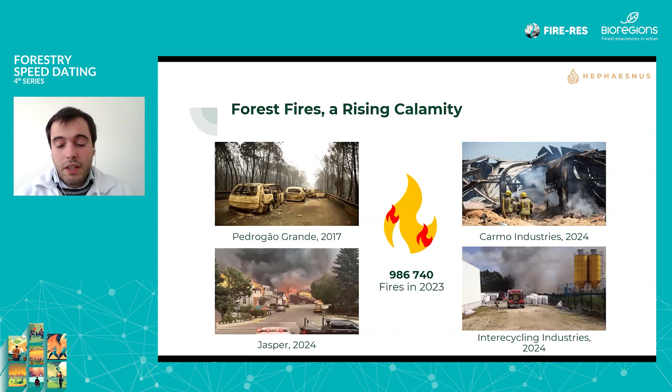Just in the last year, the small town of Jasper in Canada was completely destroyed by a nearby forest fire, causing damages to over 300 houses and structures. However, this type of forest fire is not just destroying our forests and small assets, it's also destroying high economic value. These are just two of the latest examples that happened here in Portugal, but this can replicate hundreds of times across the globe. And as the recent fires in Los Angeles have shown, large forest fires are sadly here to stay. Now, we at Hephaesnus developed a solution that will be able to tackle the damages caused by these fires, and for that, we've created Sallus Guard.

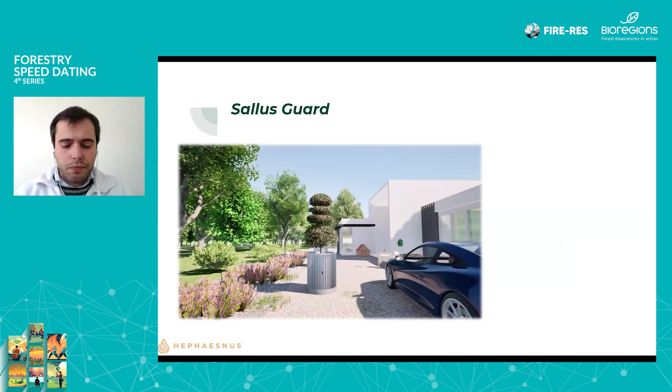Sallus Guard consists of an ornamental exterior vase, which is able to both detect and fight a forest fire in a fully autonomous, independent way. So whenever there's a fire that is coming near the vase, so imagine that you have a fire here, our vase will be able to detect it, launch an alarm, and launch our innovative retardant load onto the fire and prevent the fire from progressing and destroying your asset.

So in essence, this is a barrier against fire progression to destroy any type of economical or high valuable asset. This allows our clients to establish a safety perimeter. It is ornamental and of premium value because people can actually have some value while they don't have any fires, because they can put plants on it, they can add lighting solutions, CCTV, amongst other things.

And of course, we've already patented our novel retardant load and patented our design, so that design you're currently seeing is already protected. So in case you're wondering how it really works, here's a very small video demonstration of how our technology works. So usually when the fire is detected, there's a small delay, which is what you're currently seeing. And then our retardant load is released in a pressurized, controlled way. It's pretty much like a sprinkler system, only better.

So in this case, what you're seeing, we just filled our pressurized tank up to only 30% capacity. Otherwise, we would be sitting here for roughly 3 minutes just watching the effects of that. However, as you can see, it only released a couple of liters of our retardant load, and the floors are already completely wet, and it would be already impossible for any fire to progress, at least from its base, onto our client's properties.

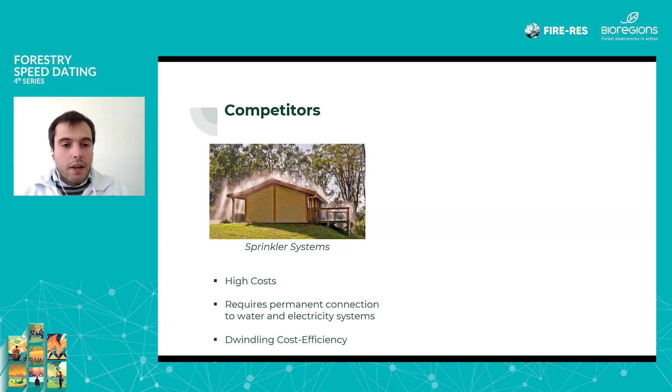At least in many European countries, the electricity systems are usually placed in rural areas as well, around forests. So if there's a fire in a nearby forest, it's very likely that the fire has consumed the power lines and therefore there's no electricity. And if there's no electricity, there's no water, so the system is rendered useless. And because of this, it has a dwindling cost efficiency.

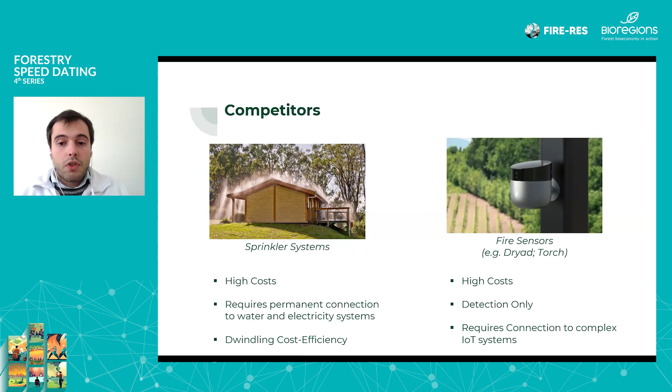These only detect fires and are only able to inform the client that there is a nearby fire, so they don't actually fight it like ours does. And again, they require a connection to complex IoT systems, which are expensive and sometimes even require maintenance.

Regarding our roadmap, this is essentially just to tell you that last year we were fully developing the product and we were just doing the last software tests. Right now, we are doing our pre-launch and we are incorporating, alongside a major telecommunications company, a communication module, which will allow the clients to receive text messages regarding the status of the vase and if there's a nearby fire. And we hope that towards the end of the year, we'll be able to internationalize our product to Spain. So by the end of the year, we should be able to be present in both Portugal and Spain.

As for our team, the Hephaesnus team is very young, but highly multidisciplinary with a few PhDs on the team. And obviously, we are a team which is completely dedicated to developing new technologies to help fight forest fires in a safer, more efficient, and autonomous manner.

Last but not least, I'd like to ask you to join us in a change in fighting forest fires. And as kindly requested, today we are looking for either an investor or potential clients for this type of technology. Thank you.

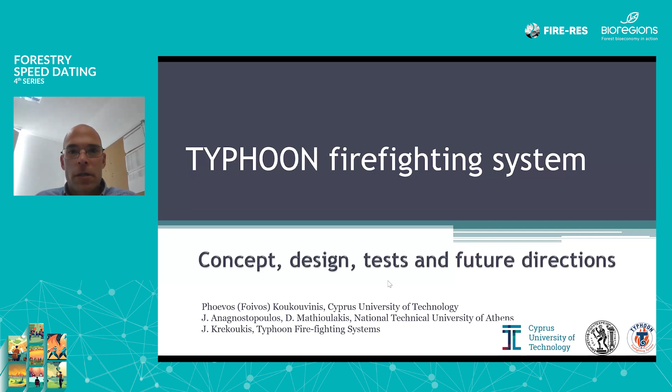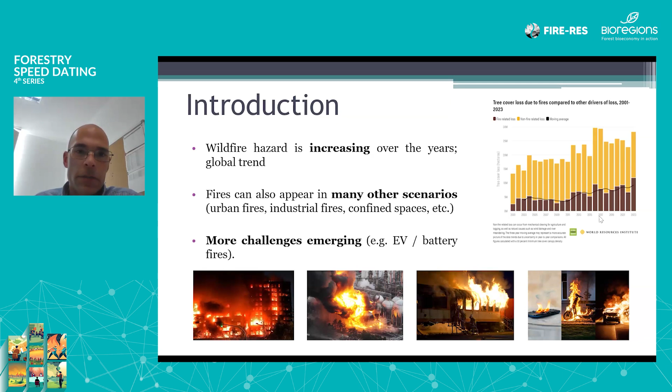Apart from wildfire hazards, there are many other scenarios. I present here some indicative ones: residential fires, industrial fires, fires in confined spaces like trains or planes, and also an emerging challenge, battery fires and electric vehicle fires, which are quite problematic as well. The reason why I'm saying all this is because we need innovative solutions to tackle all these cases, and we need flexible systems.

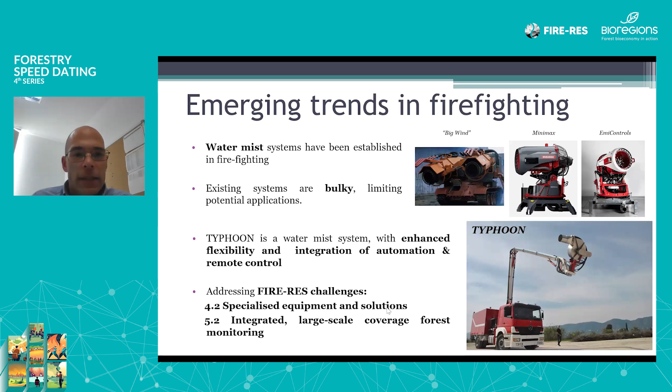This is the main advantage of the TYPHOON system, which you can see at the bottom right part of the slide. It is a system that does employ water mist. We have a very powerful fan, but it is also a very lightweight fan that allows us to put it on top of a crane. And this gives a lot of flexibility and the capability to use the system in a large number of scenarios, and moreover to have integration of automation and remote control. So the concept behind TYPHOON is aimed to address both specialized equipment and solutions and integrated large-scale coverage for forest monitoring.

Some indicative characteristics of the system: it is a crane which has a fan, and with this fan we can generate a water mist. The crane is entirely remote controlled, so you can control it outside of the vehicle. The whole system is self-propelled. It has two different engines, one for the vehicle itself and another one for operating the firefighting system. The power is transmitted through hydraulic means, and the fan is based on a centrifugal blower.

To give an example, the flow rate is adjustable between 6 to 15 cubic meters per second. This corresponds to an airspeed of up to 700 kilometers per hour. It has a power rating that can range from 100 to 600 horsepower. In terms of water, we can use an adjustable amount, from 0 up to 0.1 cubic meters per second. And the key innovation of the system that you will not find in similar solutions is that it can work with water, firefighting foams, or fire retardant foams, anything you want to use it with.

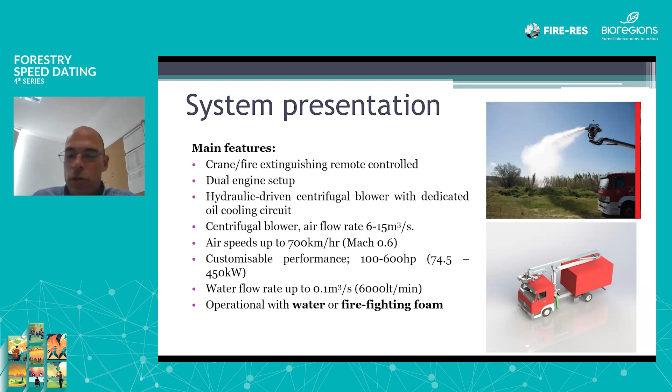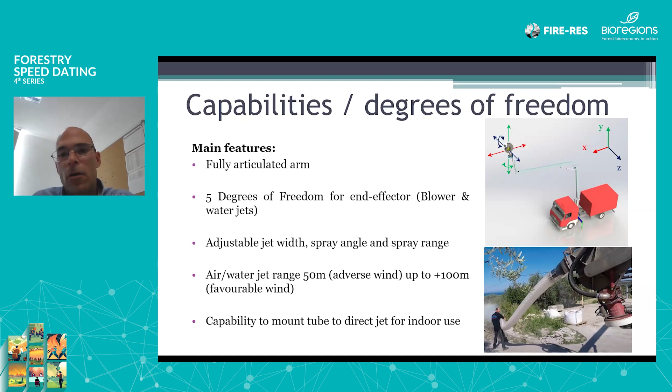We can adjust the characteristics of the water mist spray, so the width, the angle, and the range. And to give an example of the range, we can reach up to 50 meters in the case of adverse wind, and it can go beyond 100 meters in case of favorable wind. And something else is that we can mount a tube at the end of the fan, as you can see at the bottom right image, in order to direct the jet in enclosed spaces or whenever it is needed.

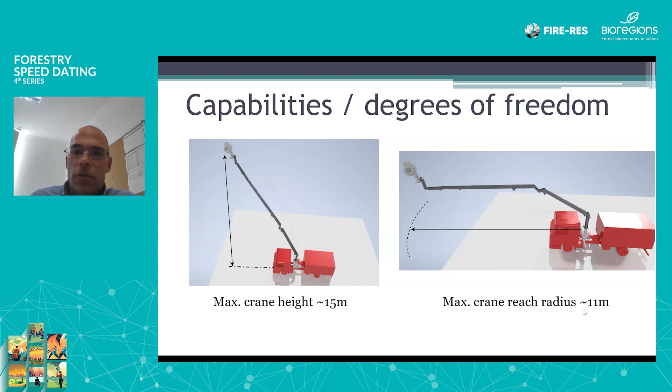An indicative depiction of the capabilities of the crane is also shown here. So it can reach up to a height of 15 meters, so you can go up to 3 stories, for example. And it has a radius of reach of almost 11 meters.

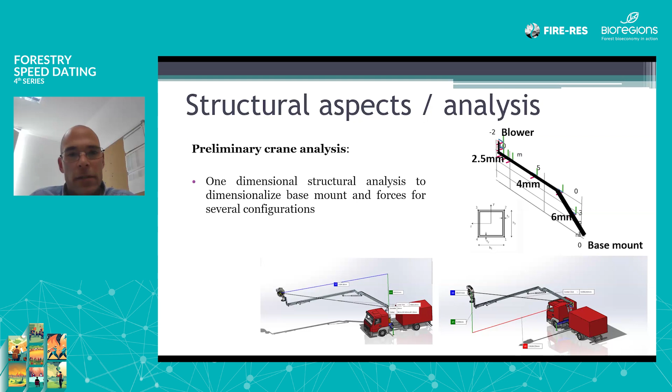We have done quite a lot of analysis in order to reach this level of maturity. So I wouldn't like to tire you with all these details, but we have done structural analysis for the crane because the blower creates quite a lot of loads. Detailed finite element analysis for all the crane and to dimensionalize piston and hydraulics, and also decide on automation and control of the system.

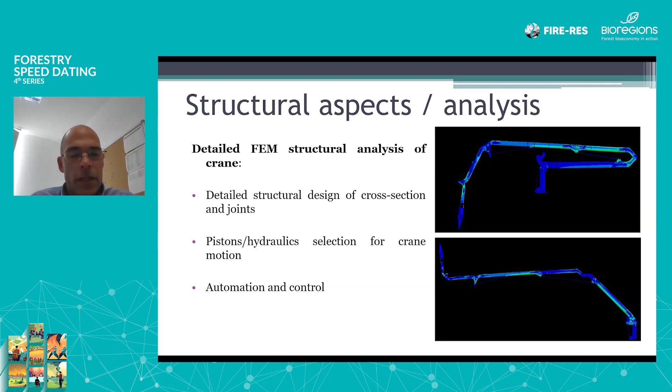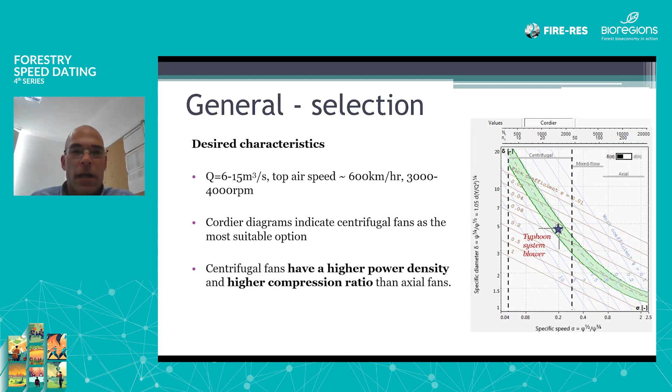Similarly applies for the fan. Again, the desired characteristics were 6 to 15 cubic meters per second, aiming to achieve a top airspeed of 600 to 700 kilometers per hour. Ideally, we would like to operate in 3,000 to 4,000 RPM. And the key advantage of our design choice is that by using a centrifugal fan, we can achieve a very high power density of the system, which means that we have a lot of power in a very lightweight and small package.

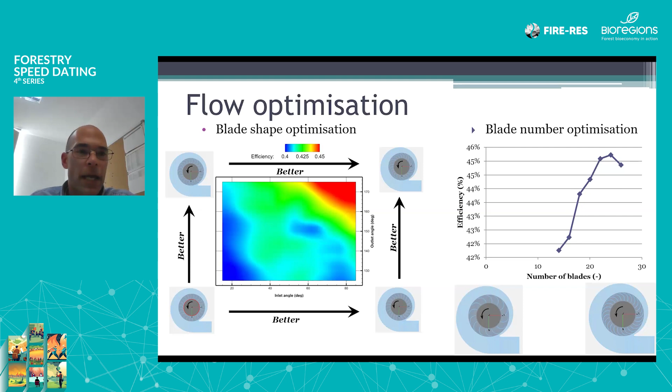Similarly applies for the structural aspects, because in terms of structural soundness, it is quite demanding to devise a blower that is lightweight and at the same time structurally sound to be able to handle the loads. In the end, we have achieved a structural capacity up to 4,200 RPM and 600 kilowatts of power of the blower. And all this within 75 kilograms of weight.

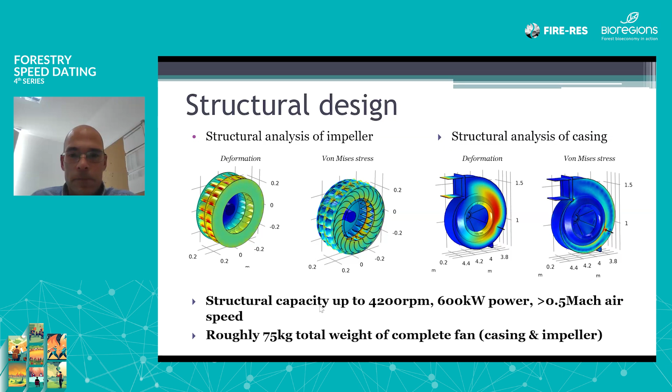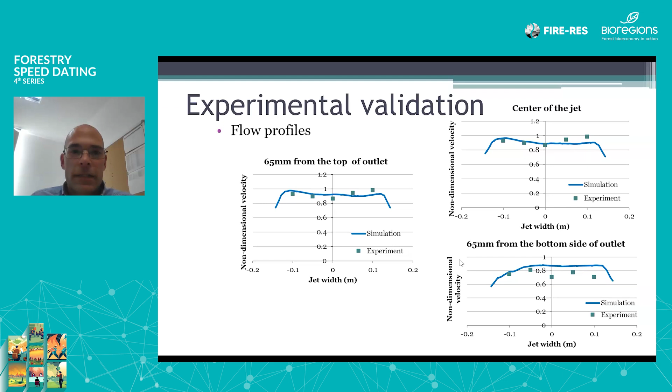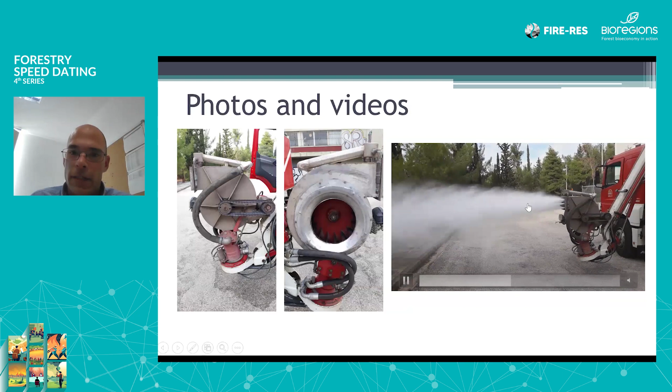Okay, I would like also to show some indicative images during the manufacturing and the assembly. We have done extensive testing of the blower on its own. And I can also show here a video of how the system looks when it is operating. So here is the blower at the end of the crane, and what you see is the water mist being generated by the water being injected at the outlet of the blower.

On top of the above, we have also a large flexibility because we can adjust the position of the blower and we can attack the fire from different angles. This allows a great flexibility in the types that we can face. It's not just forest fires, but we can also address urban fires, industrial fires, fires in confined spaces like trains or planes, and anything else. For example, specialized fires that may require a different firefighting solution, like fire retardant, not water. It is a remote controlled system, and something else is that it improves operational conditions and the safety of firefighters.

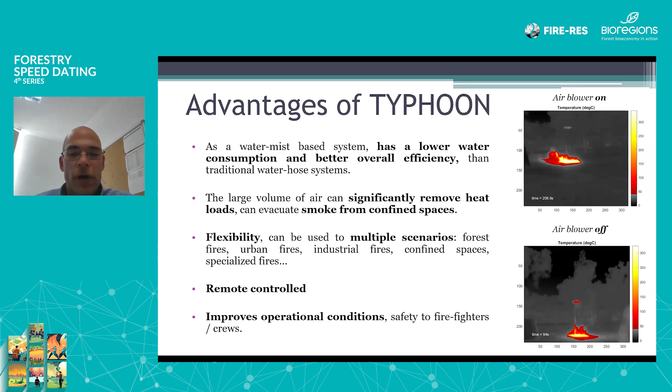In the future, what we would like to do is additional diagnostics, like integrating infrared cameras, more automation, so the whole system can operate autonomously with less intervention from humans, integration of robotics, and possibly integration of swarm systems with UAVs and UGVs, improve telecommunications, and improve the remote control to the complete vehicle.

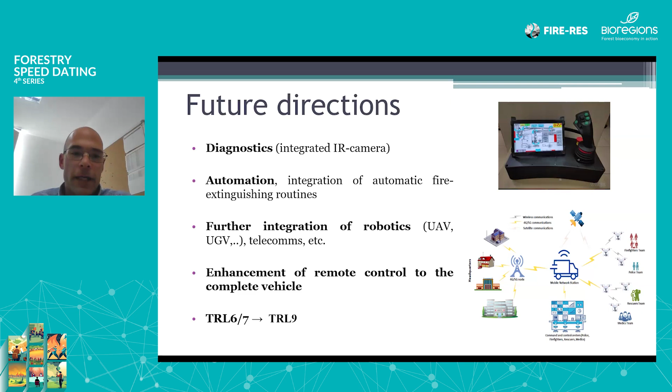So in its current state, we have a remote control that you can see at the top right of the image, and this is just for the crane. Ideally, we would like something similar, but for the complete vehicle. And we would like to advance the system from TRL 6-7, which is currently a technology demonstrator, to TRL 9 for a final solution and an end product.